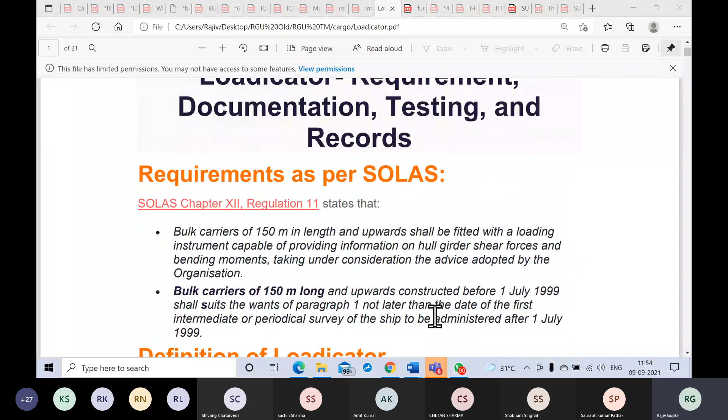So this is what we covered so far. Just to share screen. Now you will have to confirm that you can see the share screen. Yes, sir, we can see. Okay.

This is what we have talked about. Requirement by SOLAS Chapter 12, Regulation 11. This we have already talked about. Maybe you want to note down, so I'm just going to stop for a minute if you want to note down.

See, if you have a question on Loadicator, it is going to be maybe part B of the cargo work paper. You must address the issue why it is required, by what chapter, SOLAS Chapter 12, Regulation 11. You must mention that because that will exhibit that you have gone through the theory. So you must write it. Requirement is as per SOLAS Chapter 12, Regulation 11.

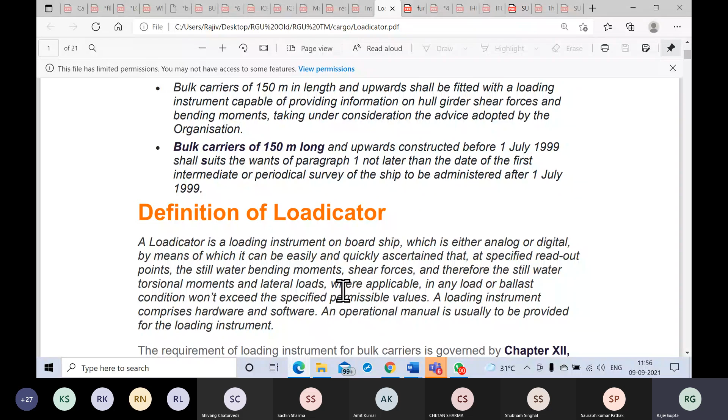Having done that, you can move on to say that Loadicator is a loading instrument which could be either analog or digital, by which you can ascertain still water shear force, SWSF, and SWBM for any load or ballast conditions, with permissible values already prefed in the instrument. This instrument will comprise both hardware and software, and it will be accompanied by what is called an operational manual.

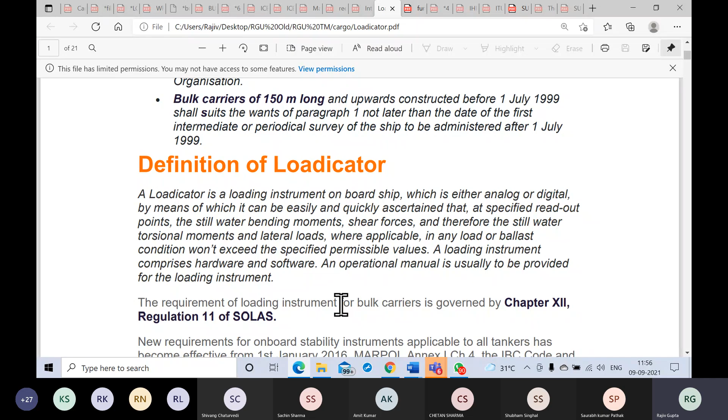Further, we had talked about this one, that requirements on board will also extend to all tankers from 1st January 16, which is coming from MARPOL Annex I, Chapter 4, IBC code and IGC code. All have been amended to include this, that you should have an onboard stability instrument. Ships constructed on or after 1st January 16 should have this instrument on board at the time of delivery. If constructed before 1st January 16, then this should be placed on board at the first renewal survey.

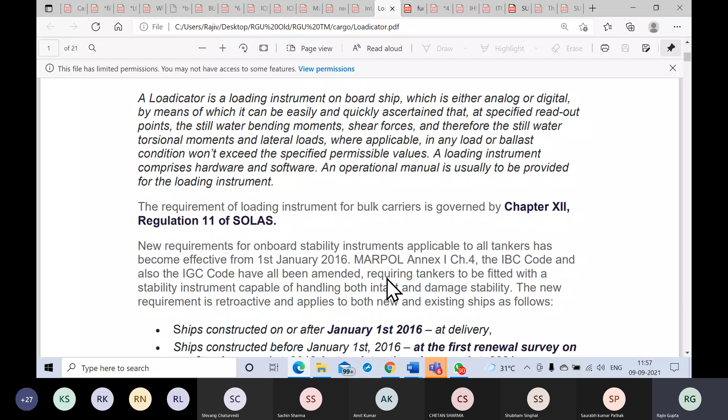It says that if the ships, tankers, have been constructed before 1st January 16, then at the first renewal survey on or after 1st January 16, but with a catch, no later than 1st January 21. So that is why I'm saying we can safely assume that all this has been taken care of. We have passed that date, 1st January 21, so it should be there now on board every tanker also.

After it has been installed, it should carry a certification from the flag, from the administration, that this is certified to be used, and they will issue a document of approval. This could be done on behalf of the flag by the RO, recognized organization. Normally, it is the class. I say normally because RO could be anyone recognized by the flag state, but mostly it is the class which is recognized as RO. So class can give a document of approval for the loading instrument, and then you have taken care.

Okay. Obviously, the tankers under the purview of IBC and IGC codes have got a certificate of fitness for carriage. Anybody worked on these kind of vessels which carry certificate of fitness for chemical tankers and gas carriers? You do have a certificate of fitness. So the approval certificate for loading instrument is only a supplement to that. First of all, you should be having a certificate of fitness for chemical tanker and gas carriers. Then, to supplement it, you are also carrying a Loadicator with a certificate of approval. You cannot have a certificate of approval for Loadicator if you do not carry a certificate of fitness to carry chemical or gas. So much for the documentation, certification, etc.

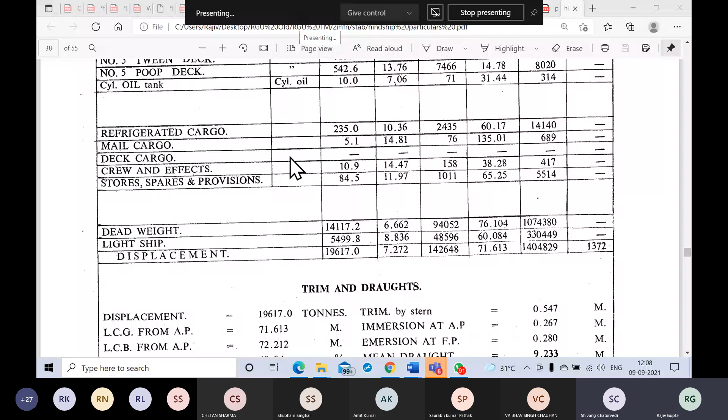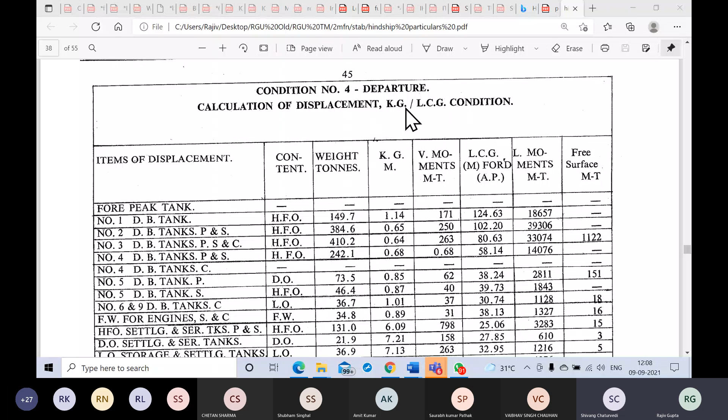Okay, regarding the test condition which we were talking about, please understand that we are just looking at an example from Hinship particulars. So this is a condition you're very familiar with. You're using the book. Condition number 4. It says departure, calculation of displacement, KG, LCG, etc. Now, in this condition, he has given the various configurations of the distribution of fuel oil, ballast, everything is given. Something which you are using day in and day out.

So instead of going for a test condition, if you put this condition into your Loadicator, which has the particulars of the ship already fed, then everything, how it is entered here in the book, you enter in the Loadicator. Diesel oil 73.5 in the 5 DB tank port. Example, HFO 46.4 in 5 DB tank starboard, etc. You go like this. Put cargo in number 4 hold, number 2 hold, etc.

You keep filling up, and then what you need to do is match these results. You should end up with trim by stern, immersion at aft perpendicular, emersion at FP, mean draft, draft at AP, draft at FP. Okay, one thing, where are the Hinship's drafts painted? Painting of draft marks as far as Hinship is concerned is on what location?

Please remember, as far as hinship is concerned, the draft marks are painted at the perpendiculars, just for reference.

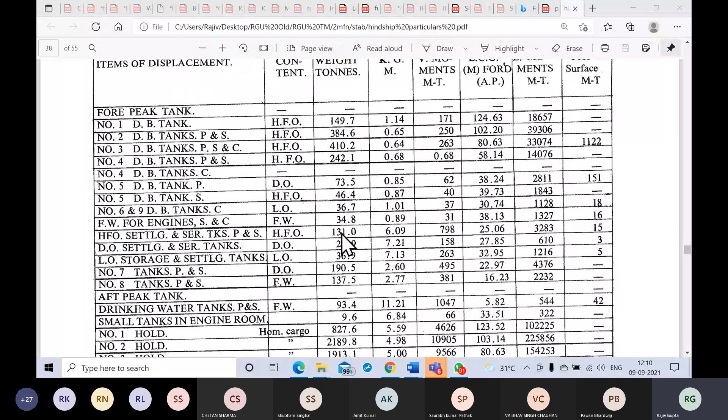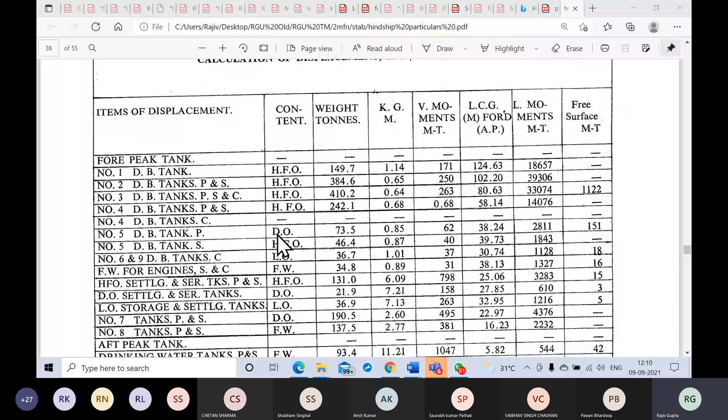But sir, does testing require entering all the values, including the distribution of weights? Yes, you have to enter all of that. Let's say you select condition number 4 as the test condition, then you enter all these values inside the loadicator, everything. The end result should match here, including KM, KG, GM solid, FSC correction applied, corrected GM - everything should match.

Yes, it matches. Let me tell you one more thing - because you are going to start working as chief officer, and because you will be working on the loadicator of that ship which you have taken over as chief officer for the first time, it is a good idea to test it out so that you are confident about the loadicator. The first thing you should do is select a condition, maybe not the test condition, and then enter everything and see that the results are matching, which will give you personal confidence in that loadicator, since it is showing the same results as the approved hydrostatic particulars. So now you can gain confidence in the loadicator itself.

You must do it, for every ship you join, definitely for a ship you're working on for the first time - maybe not first time as chief officer, but the ship itself for the first time - you must check out the loadicator to gain confidence in the instrument.

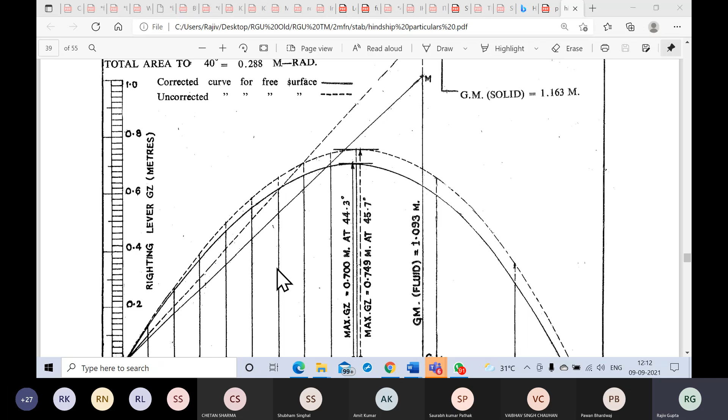As you have done it, and if you see everything is good, results are matching, everything is fine, then what will you do? Take a printout with a clear indication of which condition you are talking about. Take a printout, sign, stamp, and get the master to sign it, and keep it as evidence of having tested the loadicator, which is going to be required.

It is going to be required by the class surveyors, etc. when they come on board, maybe even PSC. They would like to see that you have tested the loadicator. So this is one way to do it, and you must document it by signing, stamping, and keeping a record, and of course it has to be countersigned by the master.

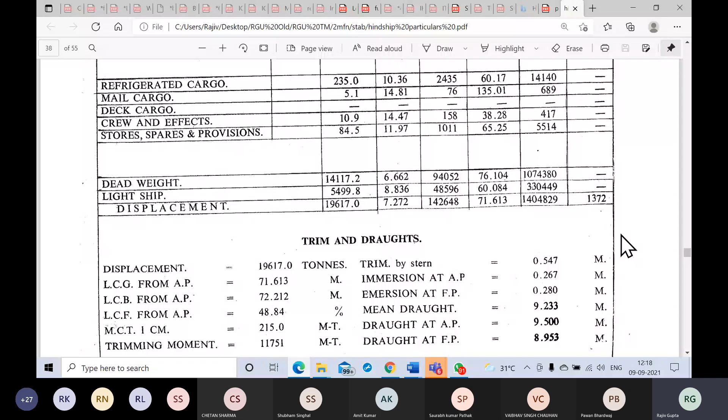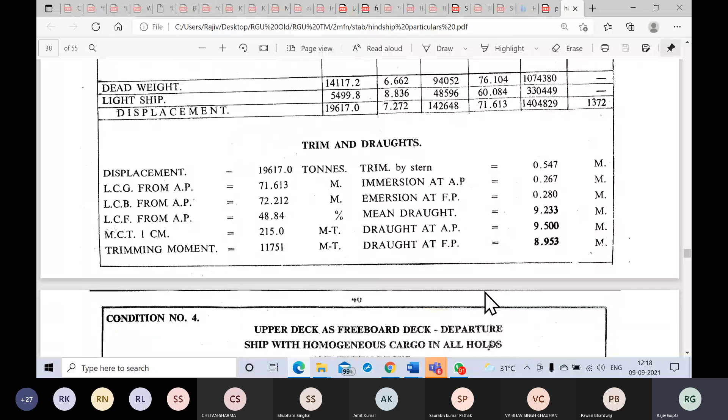If your Loadicator is not working, one thing is certain - dispensation is always available to be applied for, but you will have to prove before dispensation, you will have to prove how you will work in lieu of the Loadicator not working. Then you may get it, if you can prove it correctly, which you will be able to do.

Many times you discuss, why do we calculate this SFBM manually when the Loadicator is there. But there is one condition where the Loadicator will not be useful because it is not working. Then you have to be aware of the facts and the system to be followed to manually calculate. Somewhere this knowledge will come in useful. Although the chances are very low, it can happen.

Okay, so this is what I had opened to show you. You can select any condition. We had seen condition number 4. You can scroll down, you can go. If this is okay, you can go down to condition number 5 and maybe feed this one and again match the result, but you have to do this only once.

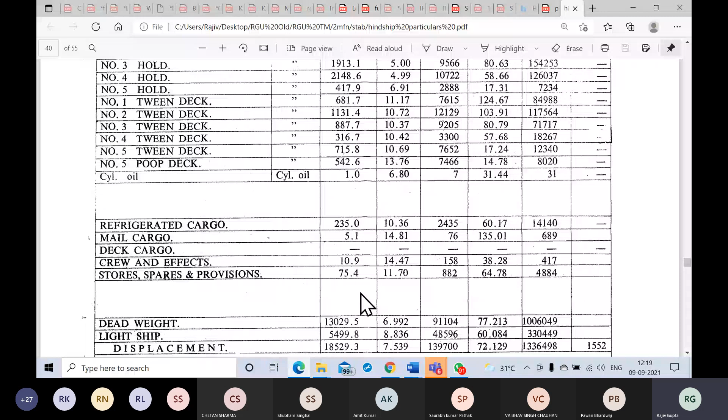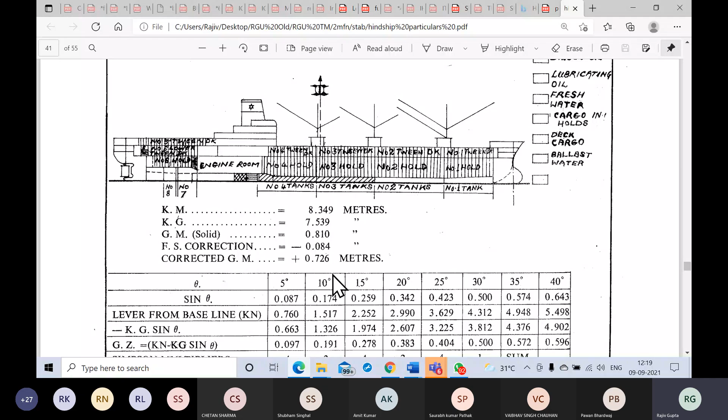Once is enough. If you have fed in everything for one condition and the results are matching, including drafts, including the LCF calculation, and also KM, KG, GM solid - everything matching - then you are confident that the Loadicator instrument is working correctly. You can preserve the results to show anyone who comes that your Loadicator is effective. But that is what you need to prove.

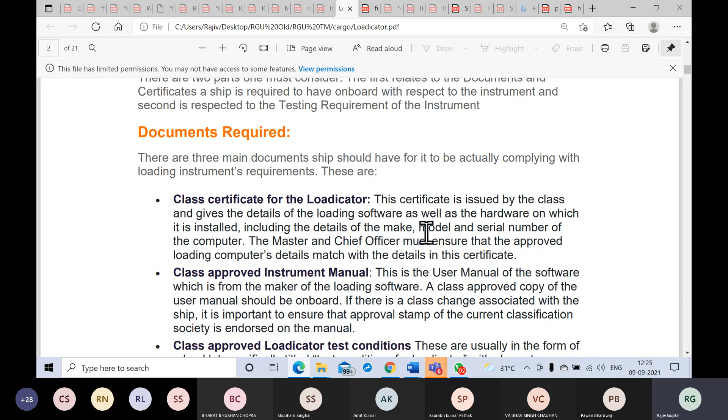Okay? Then of course you should have a class approved instrument manual. This is a user manual. This should be also there from the maker of the software. Approval stamp of the classification society should be there on the manual. And if there is change of class, then the approval stamp of the current classification society should be there.

Now, obviously, when you talk about test conditions, one thing is simple, that you have a test condition inside the hydrostatic particulars. But I always believe that you should take another condition and use it as a test condition just for your benefit and for your confidence. Use any condition given in the particulars as a test condition. It should match. The result should match.

Test condition, ठीक है, match करेगी. But then you see, maybe the Loadicator is prefed with the test condition. So best तरीका is that you select any random condition as used for test. ठीक है जी?

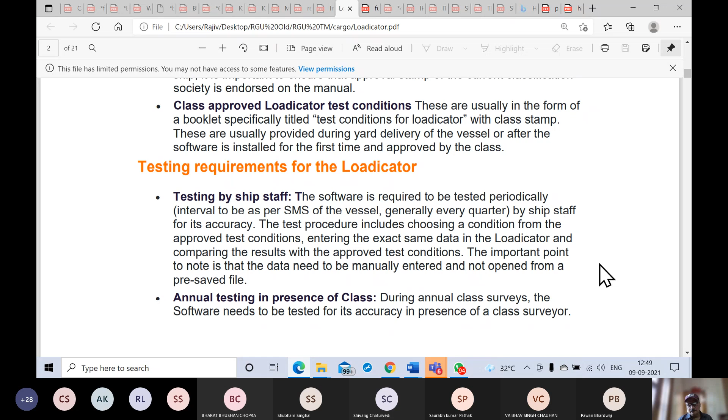Also, when you're doing it in presence of class surveyor, it is a good idea, although he will also do it, but you're supposed to take a printout of this, stamp it, and also ask the class surveyor to stamp it. You have more authentication. And then of course you retain it in your file.

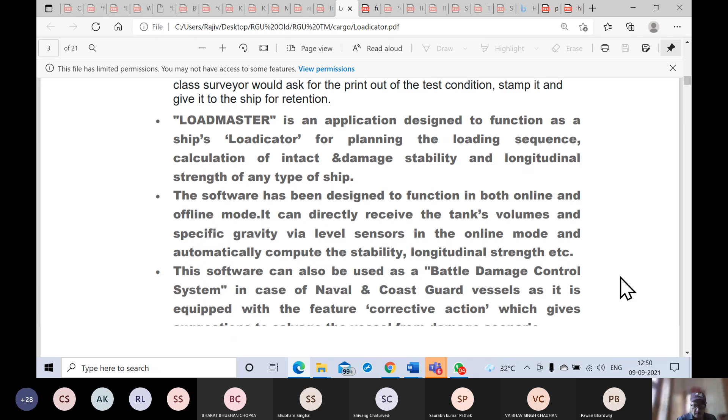So there is another way by which the Loadicator, the software, can be designed to have an online input, which means directly receive the tank's volumes via level sensors in the online mode. High tech may not be possible in every Loadicator, but it is possible that they have an integration with the online level sensors, so that inputs for tank's volume and specific gravity can go straight into the Loadicator.

And then it can automatically compute stability and longitudinal strength, but this is high tech, it may not be possible in every Loadicator. Which may not be a regular function, but it is possible.

So when we talk of preparation for loading condition, then you should have the facility to create and store new conditions, apart from the ones which are already saved. Retrieve and edit stored conditions. Manually enter tank soundings, percentage, volume, and holds, cargo compartments. A part of damage stability criteria should be incorporated into the Loadicator so that you can actually have a view in case there is a damage.

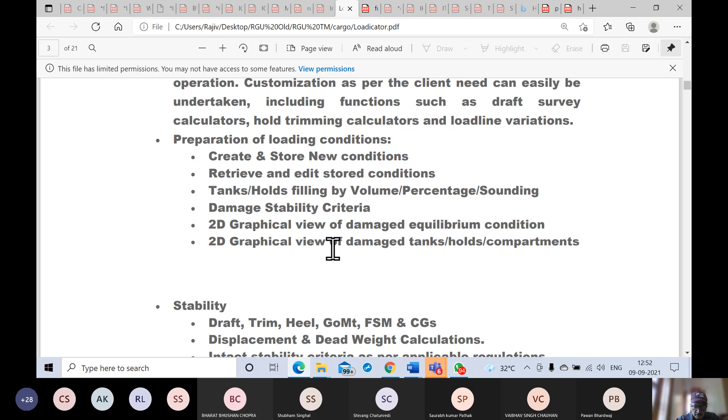As far as stability is concerned, inputs and then output should include draft, trim, heel, GM transverse, FSM, CG, etc. Displacement and deadweight calculations, intact stability criteria as per the applicable regulations. You are aware of this one, right? Intact stability criteria. And then the generation of reports. Printable.

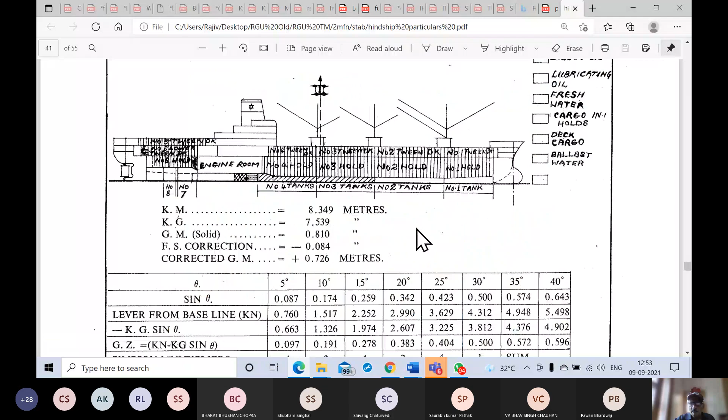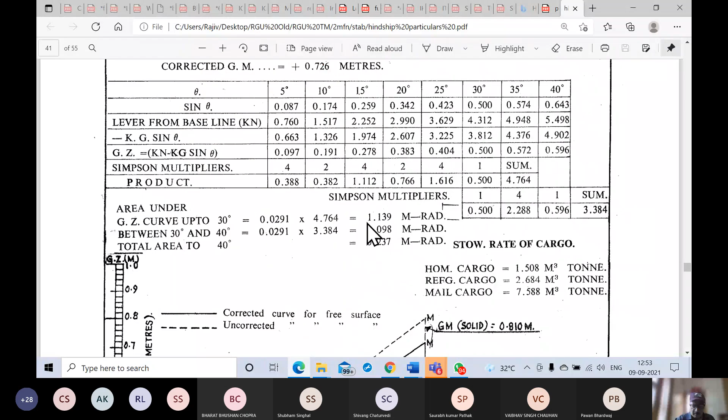This one is telling you the intact stability criteria. This should be also included in your printout for the Loadicator. There is a stability criteria. What is the GZ curve up to 30 degrees? How much should be the area under the curve? Minimum requirements, and this should also match area between 30 and 40 degrees from this diagram. This diagram.

Which is a GZ curve. So this you can do manually also. You can actually plot it yourself also. But in a Loadicator, this will be exhibited like a printout. On the y-axis, you will have the righting lever, height of GZ, and on the x-axis, you will have various angles of heel. Interval could be maybe lesser, depending on the software, but normally 5 degree, 10 degree, 15 degree like this.

And of course, the issue about minimum GZ or maximum GZ and GM fluid, which is obtainable if you draw a perpendicular line from 57.3 degrees, extend it and then come across. And reading on the y-axis will tell you how much is the GM fluid, initial GM fluid. So this is something which will be also captured in the Loadicator.

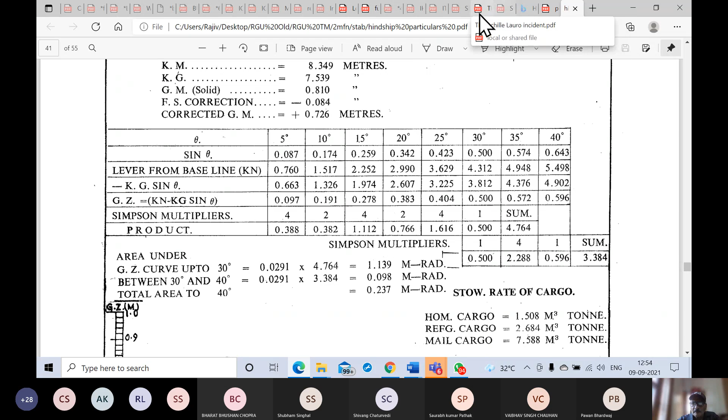We have 1 minute, just give me a minute. Trying to look at our PDF. हो गया. Yeah.

Then of course strength calculations.

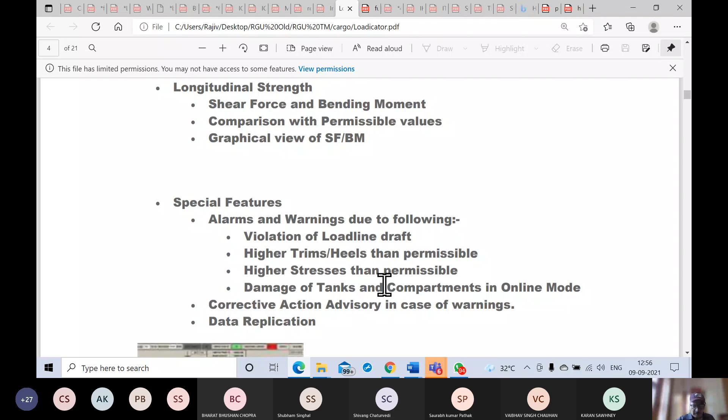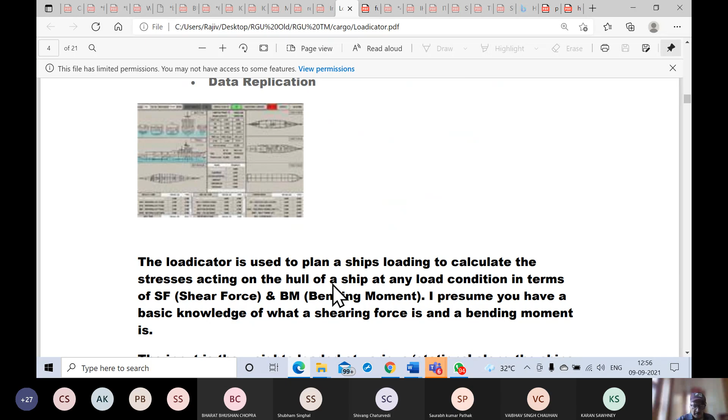So this is also used in the Loadicator to obtain ship's loading, hull stresses, etc., shear forces, bending moments. The weights are input at what are called various stations along the ship's length. Weights could be in terms of cargo, fuel, ballast, etc.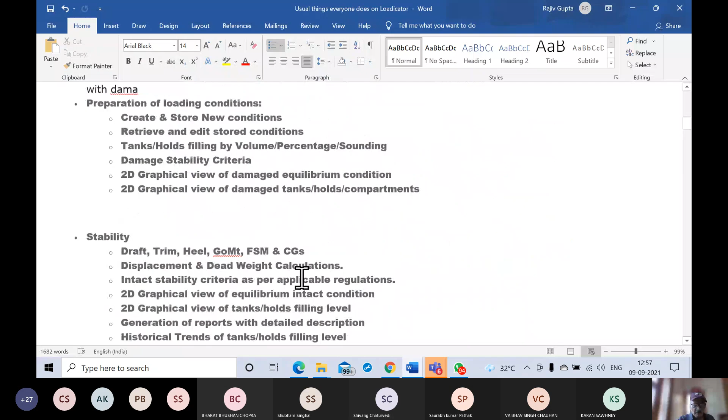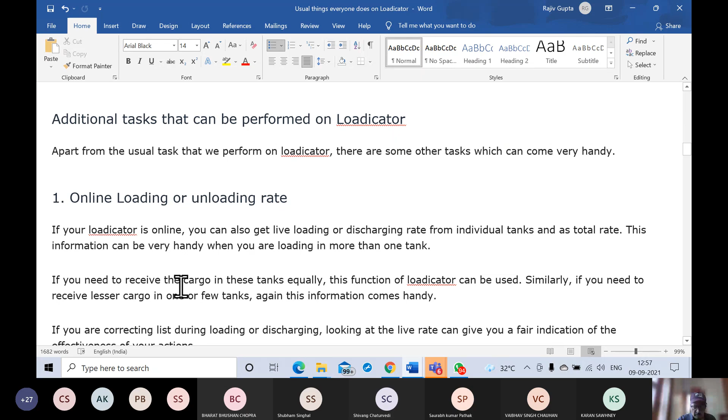Some additional tasks which may be performed is online loading or unloading, which means that you are integrating it with tanks, individual cargo compartments, so that online, straight away the input is going into the Loadicator. Again, this is not going to be every time. I mean, this will depend on the equipment, the kind of instrument you are using.

It can give you an indication of rate of loading because you have input, let us say 10 minutes interval. So it will calculate the difference in cargo quantities for last 10 minutes and then average to 1 hour to give you a loading or discharge rate. After all, it is a computer, just a computer.

Okay. कोई भाई अपना on the move, on the move. Sani, are you in somewhere? No issue with me. Just asking you because you should mute yourself.

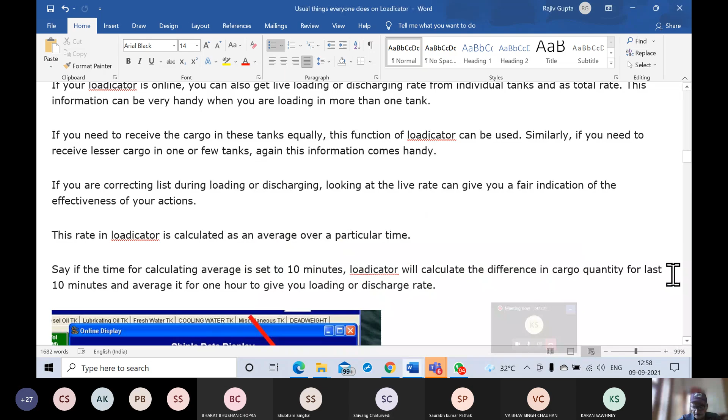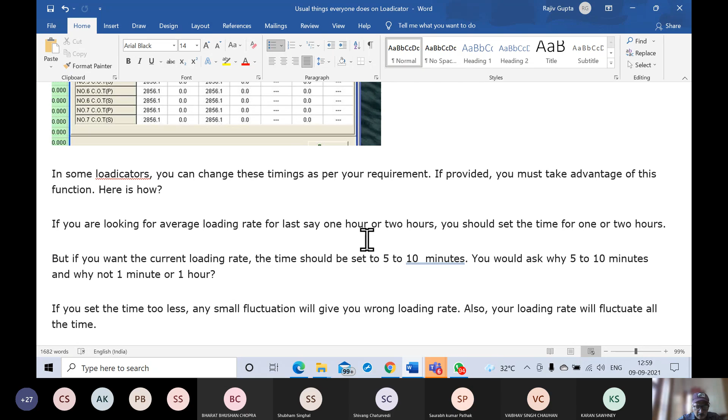So you can use it for your advantage, the loading rate, discharge rate, etc. Then you get clear indication for what is happening in last 1 hour or 2 hours. You want current loading rate, then the time should be between 5 to 10 minutes. Because if the time is too less, small fluctuations will give you wrong loading rate, and your loading rate will fluctuate all the time.

If your time is set too high, then the average rate for that time will not be the present rate. So you will have to come to a conclusion, if you are configuring this for loading rate or discharge rate, how much time interval it should take. Now, there could be some fixed errors in the loading equipment. That is what

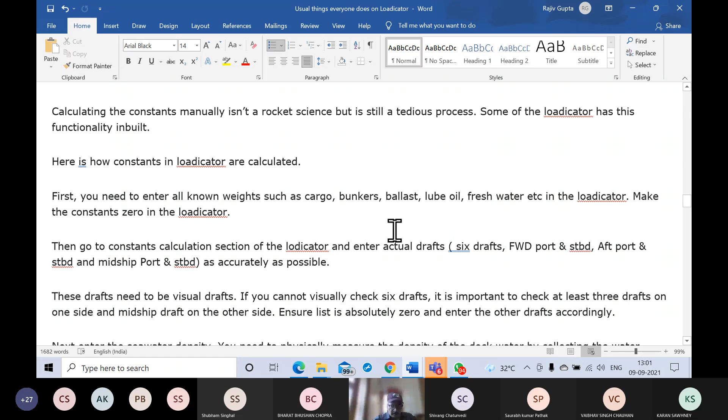Okay. So we are saying how to calculate constant using a Loadicator. So firstly, you enter all known weights like cargo, bunkers, ballast, lube oil, fresh water, etc. in the Loadicator. Now go to the constant calculation section of the Loadicator and enter actual drafts, which are read drafts, which you have actually read. 6 drafts. Forward port, forward starboard, aft port, aft starboard, midship port, midship starboard. They have to be visual drafts.

If you cannot read 6 drafts, which should not be a very difficult thing, then you have to read at least 3 drafts on one side and midship on the other. In this case, you will ensure that list is 0. Enter the drafts. Because the list is 0, if you can read only port, forward port is let's say 10 meters, then because there is no list, you can safely enter forward starboard also 10 meters. Although it is not a good thing, but only in a case where you cannot read 6 drafts.

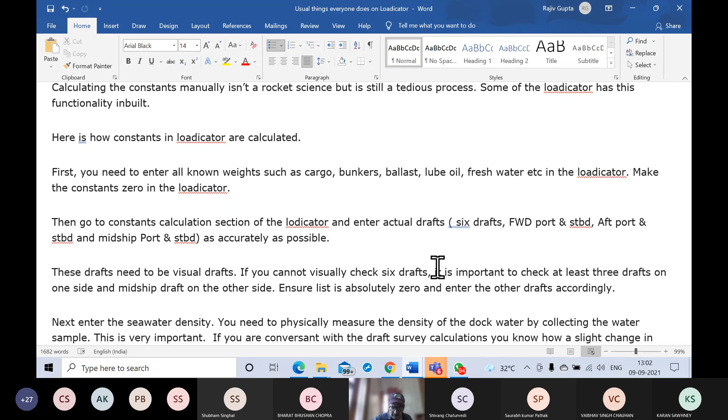Once you have entered the 6 drafts, the next step will be to enter the seawater density. Again, by actually measuring it. At this point of time, you will have to be careful because even a small discrepancy in the density can offset the value of your constant. Because density plays a major part in calculation of the present displacement. So maybe you would like to take 3 checks of density and take an average value.

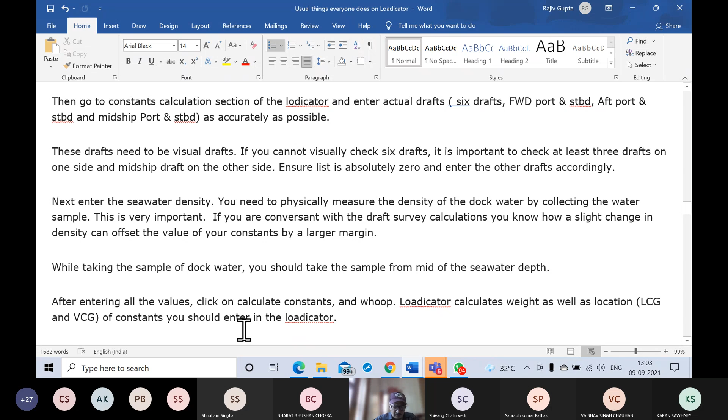Once you have done this, the Loadicator will calculate the weights, and it should be 0; if not, then that is the constant. If it's still arriving with some weight displacement, then that is the constant. Because you've entered all the values, including the seawater density, it should say 0 because no cargo has been loaded. Then if you have a remaining value of weight, that is the constant.

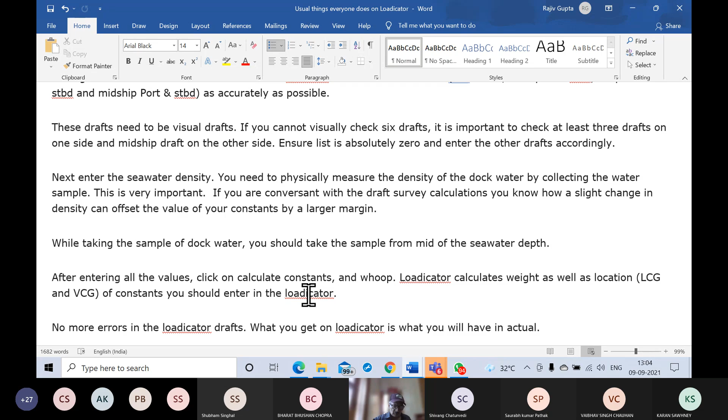And we are going to talk more about it when we actually go and do numericals on draft survey. This is only a Loadicator thing for us to discuss as theory. We will actually do calculations involving draft surveys when we come to the topic of draft survey, in which case the constant will play a major role. You can also do this. You can actually

calculate. Haan ji, boliye. Karan Sawhney, I request you kindly mute yourself. 2-3 times it has happened. I've tried to mute you. Your voice is creating disturbance. So just mute yourself. Karan Sawhney. Okay.

You can also use the Loadicator to go a step further. You can use it to reach a desired trim, list or draft. Otherwise, you have to use trim tables to get to this conclusion. If your Loadicator is not available or is not functioning, then you have to use trim tables. If you have a Loadicator, then it's simple, just use it to get the desired trim, list or draft. If not, then you have to use trim tables from your hydrostatic particulars. You are aware of that, trim tables? Yes, sir. Okay, very good.

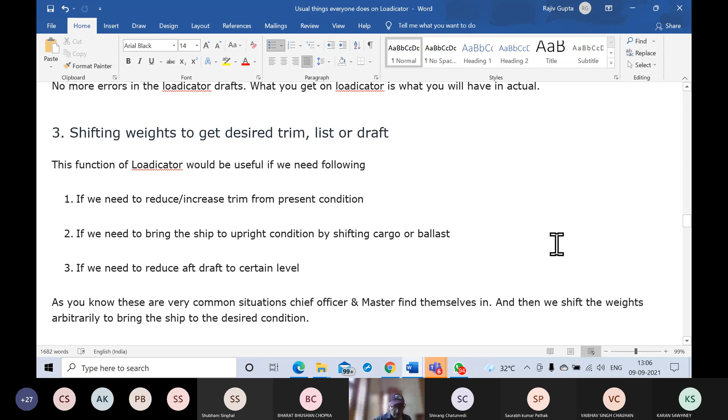Some functions which can be done with Loadicator, that is what we are looking at. We are not doing an exercise on it, because actually speaking, every one of us should have a Loadicator software, and then we should use it to work out and compare results. But of course, this is not possible right now. So we can only discuss the theory part. Sir, I have a question. Yes, please.

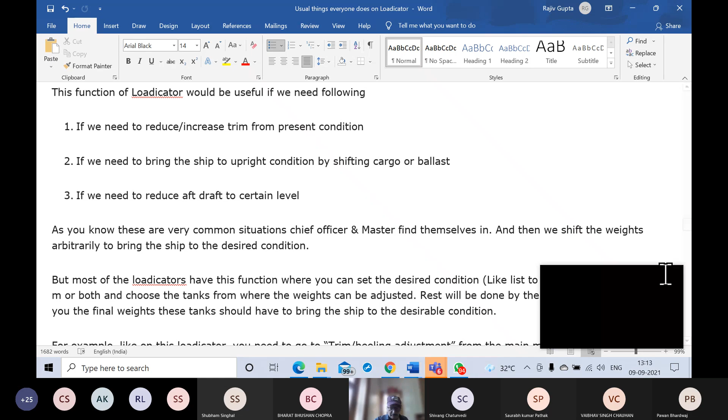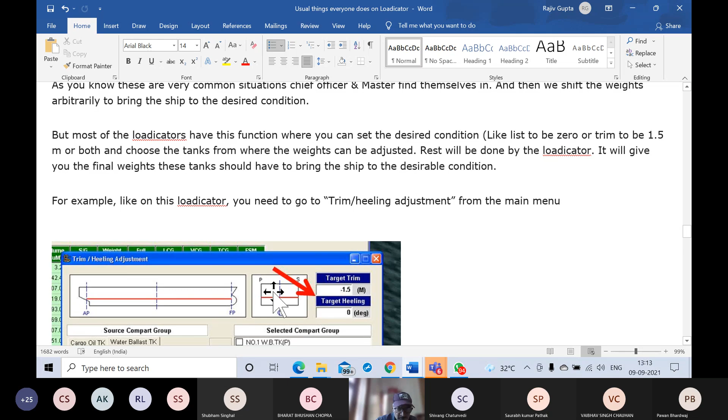So you can use this to calculate how much desired trim or draft you want to achieve by using the loadicator, or if this facility is not available, then you have to use trim tables. One example is here, but this is not generic. This is customized for this particular loadicator.

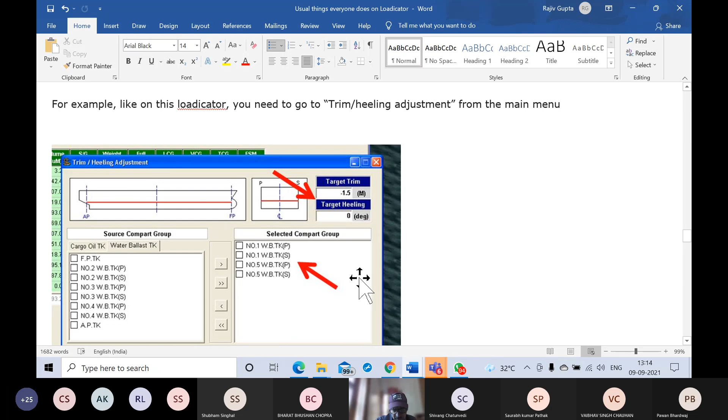You go to this button, target heeling, target trim, click on it, then come to a conclusion. But this is not with every loadicator. This is an example for this particular loadicator. There may be some other buttons, there may be some other facilities, but more or less, it is user-friendly equipment.

This is also possible with some loadicators, that you just enter the ullage of a particular tank and it will give you the volume to match with your ullage, because the ullage table is pre-fed. But it is also possible that you may have some discrepancies, because maybe the ullage table is not corrected in the loadicator for trim and list.

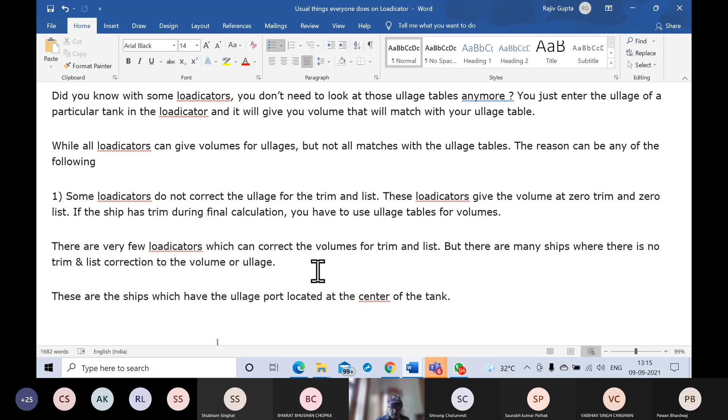Mostly the loadicators give the volumes at 0 trim and 0 list. If the ship has got some trim or list during this, you will have a discrepancy in the readouts. So these will be localized problems. You can also have wedge calculations done.

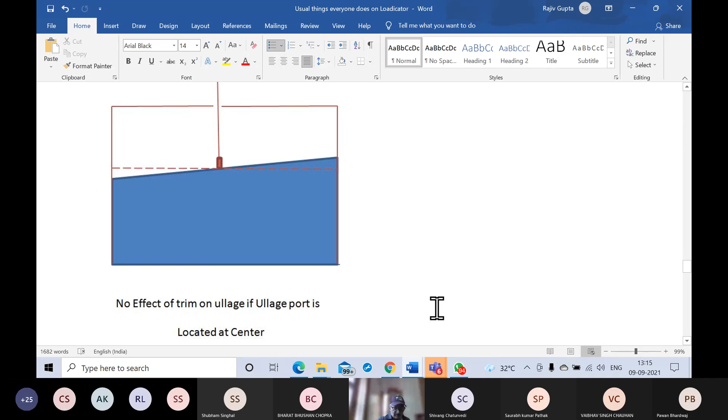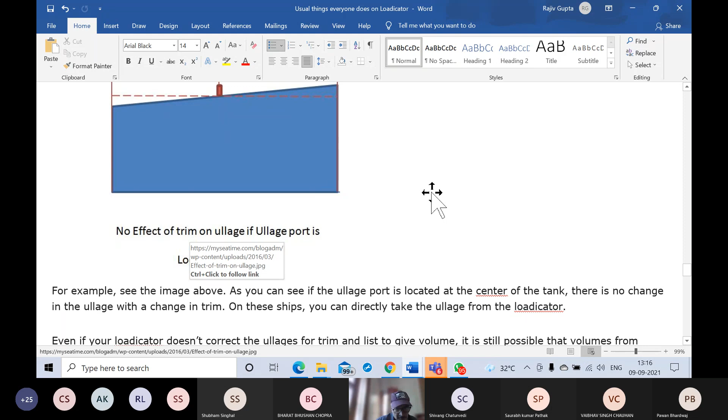This is just telling you the effect of trim, or no effect if the ullage port is located at the center. Here, actually speaking, the ullage is varying. Here it is empty, here it is full. This is the wedge. It is the wedge formula. But if the ullage port is located at center, it will give you correct data. No change of ullage with the change in trim.

And the wedge calculation, which is also part of your tanker problems, like this. This is the wedge. Again, this will be more clear when you do the tanker numerical on wedge calculation. But what we are discussing is that even the loadicator can be used to do this calculation.

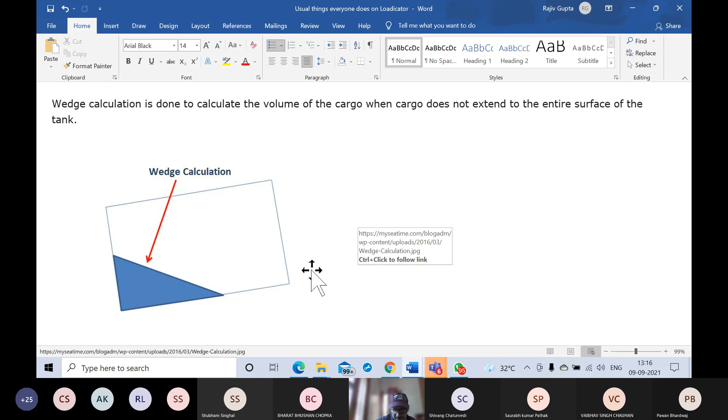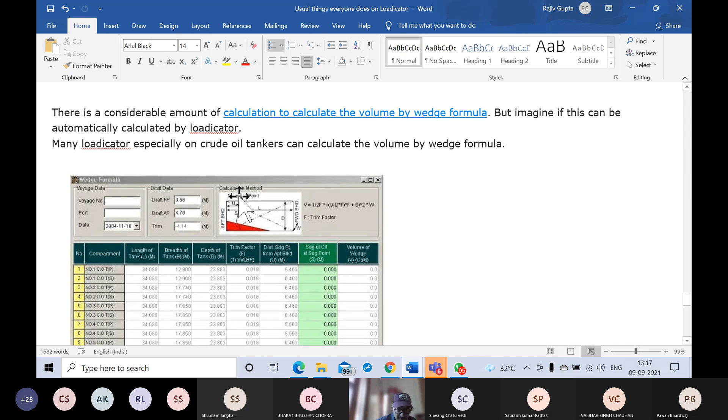So some loadicators, especially on crude oil tankers, facilitate the calculation of volume by wedge formula. The wedge formula is prefed. You enter the data and it will calculate by wedge formula the volume of the tank right now, because the wedge formula itself is prefed. This is the point.

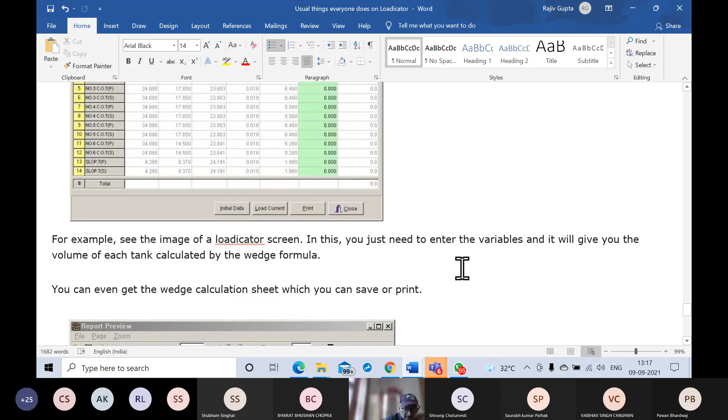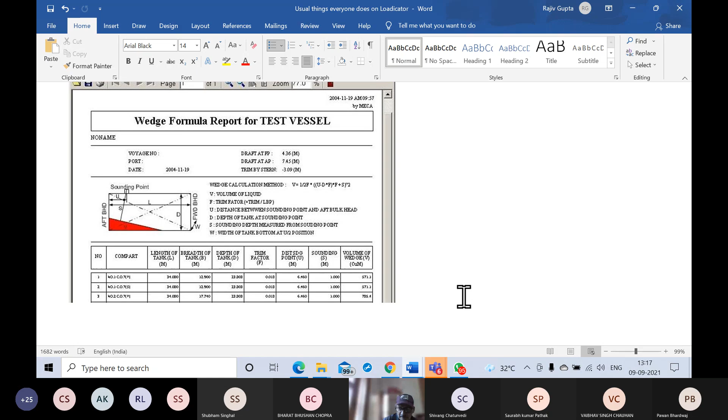It should be possible to save it or print it. Wedge formula report, it says, for test vessel. Yeah, that's about it. Test condition is done. Stability data that will give you special features is done.

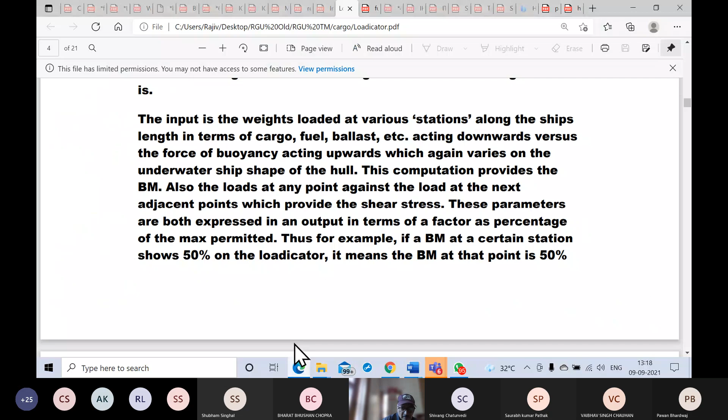So it is never advisable to exceed the stresses of 100%. More than 100% is never advisable because in a seaway this could exceed 100. So if you're close, maybe 98%, in a seaway this could go more than 100%. So you should always keep a buffer. Do not exceed more than 95, 96% for old ships.

Please be advised and note, which I always agree, the ship should be regarded as a girder, a big girder. After that there are compartments, that is all separate, but it should be regarded basically as a girder. When you say a girder, it is prone or susceptible to bending moments and shear forces. So that you should always keep in mind.

Just imagine the ship as a girder. Then it is going to bend because of localized stresses. If the weight exceeds in one location or station of the girder, it is going to create localized stresses.

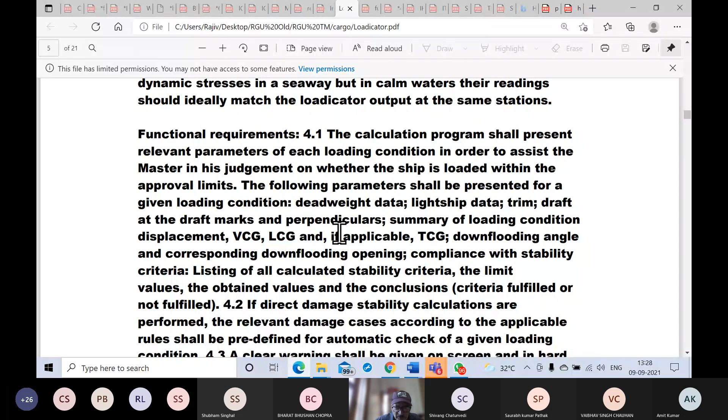So what is the functional requirement of a Loadicator? Firstly, the calculation program, which will present parameters at each loading condition. So the Master is assisted in determining whether the ship is loaded within approval limits.

Now when you talk of parameters, this will involve deadweight data, lightship data, trim, draft marks and perpendiculars, summary of loading condition, displacement, VCG, LCG, etc. This is a functional requirement, all this should be in the output of the Loadicator.

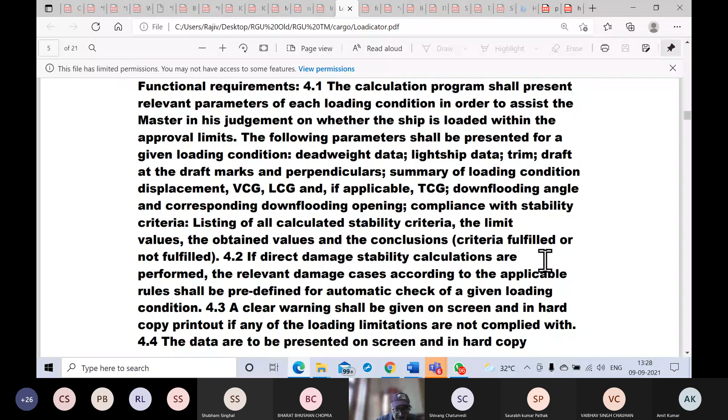Compliance with the stability criteria, listing of calculated stability criteria - these are the functional requirements which you can easily list out if asked, because you are a student of naval architecture. So everything involved for calculation of stability you can list out, should be present in the Loadicator.

If any loading limitations are not complied with or exceeded, the functional requirement is that it should give a clear warning on the screen and hard copy printout.

The Loadicator, I'm sorry I did not mention it, no harm mentioning now, is also very effective and used for carrying out ballast water exchange. Do you know how Loadicator is used in ballast water exchange?

Yes sir. A ballast water exchange can be done by the flow through method and other methods. In that case we can check the stability criteria using the Loadicator. But nowadays, sir, we are using the BWTS system, so it is effective in loading and discharging operation only.

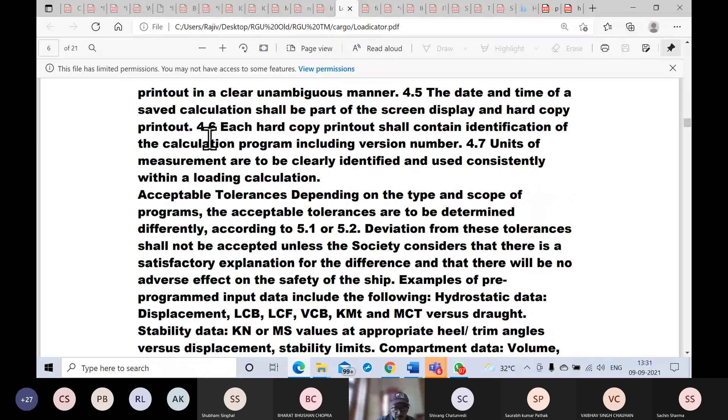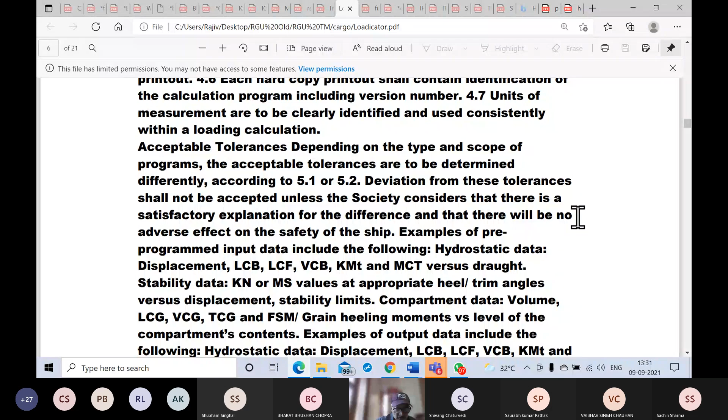When we talk about printouts, the date and time of calculation should be in this hard copy printout also. Identification of the program being used, units of measurement - whether tons, long tons, meter cube, anything - that should also be identified, and the acceptable tolerance levels.

Deviation from these levels should be with consultation with the class which your ship is under. If any satisfactory explanation is not available, there will be no excuse for exceeding tolerance level.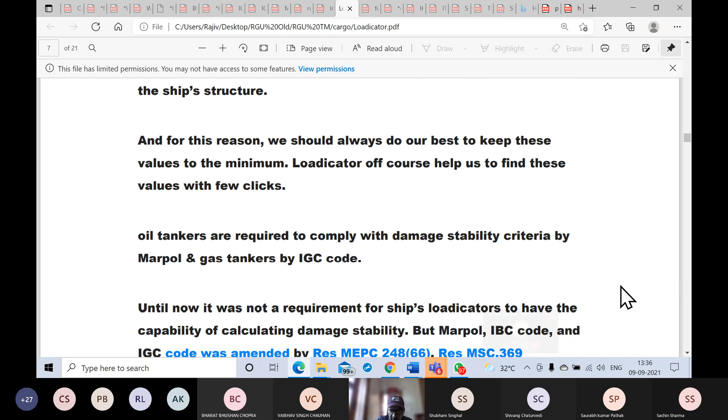Oil tankers are now required to comply with damage stability, and this is now required by MARPOL, gas tankers by IGC. And these are the resolution numbers which talk about calculation of damage stability criteria by MARPOL, IBC and IGC.

In fact, this is important, you should know this because you are going to be chief officers. This is to be complied with, definitely by first special survey after 1st January 2016. All tankers need to have Loadicators that can calculate damage stability. This is a requirement, it has to be complied with.

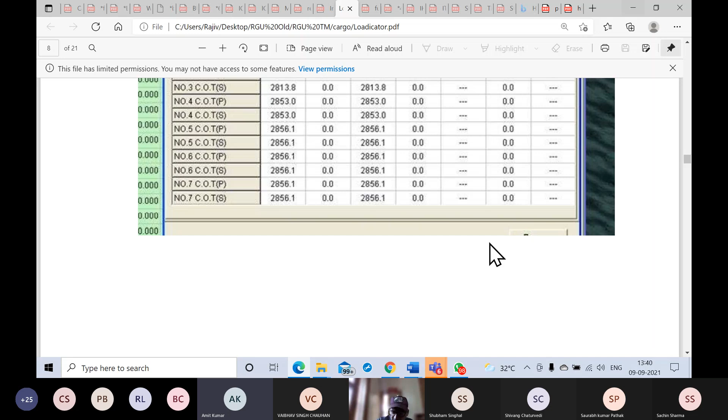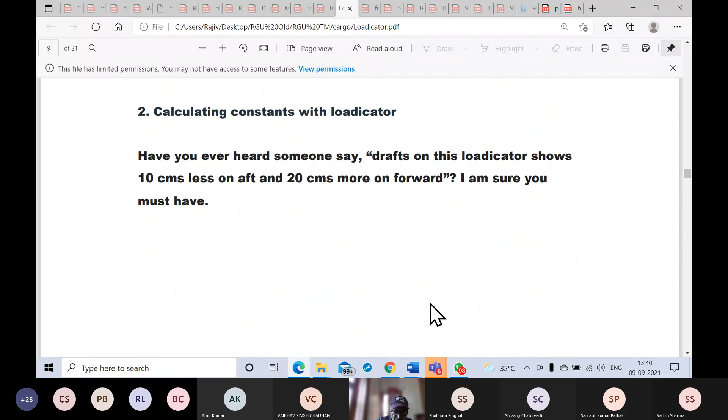So that covers loading rates and calculating constants which we also saw. Now tell me, have you got anything to be raised for this topic? Anything?

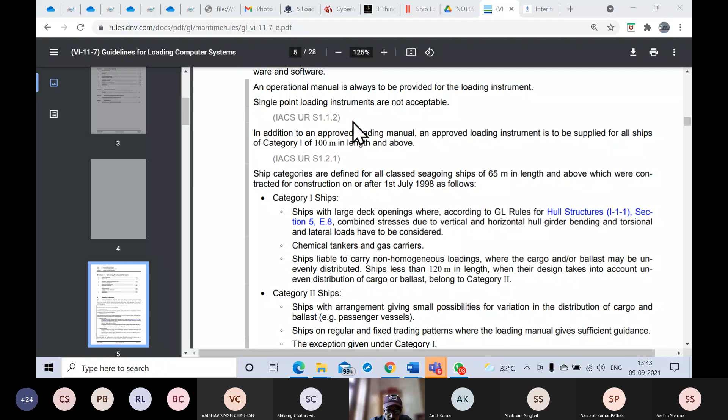Loading instrument, which we have already seen, could be analog or digital. Now, operational manual - this is also covered. Single point loading instrument is not acceptable. In addition, the loading manual and loading instrument categories apply to all class vessels - seagoing ships 65 meters in length and above.

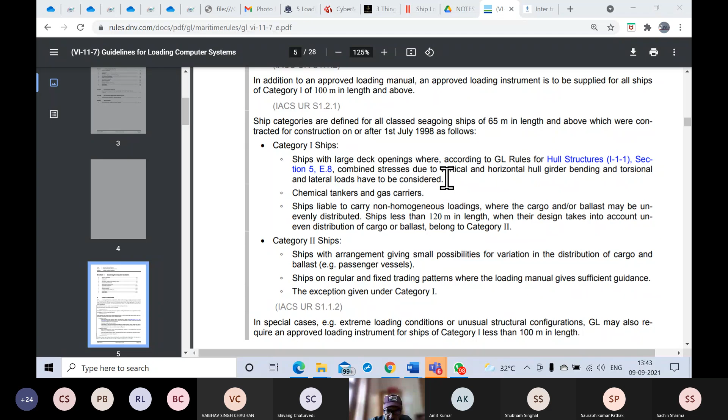And they have divided the ships like this: Category 1 ships are ships with large deck openings, with combined stresses due to vertical, horizontal, hull girder bending - such as chemical tankers and gas tankers. Category 2, now.

Ships liable to carry non-homogeneous loading, where cargo and ballast may be unevenly distributed. Ships less than 120 meters in length, when design takes into account.

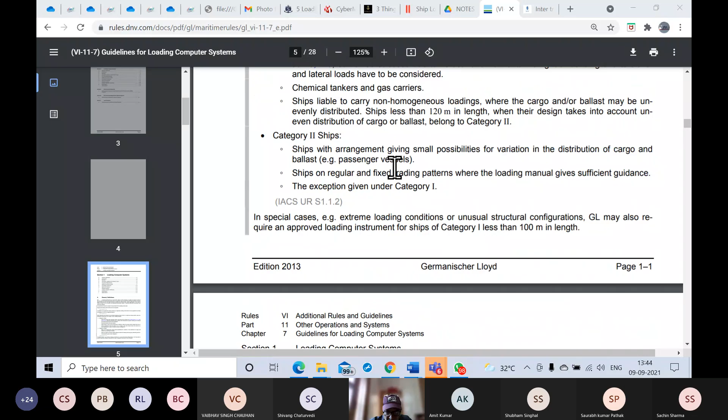Category 2 ships are ships with arrangements giving possible variation in distribution of cargo and ballast - cargo and ballast, for example a passenger vessel. All of them need a Loadicator. Ships on regular and fixed trading patterns.

To come to a conclusion, large deck areas may apply for a container vessel. So, broadly speaking, all types of ships are covered.

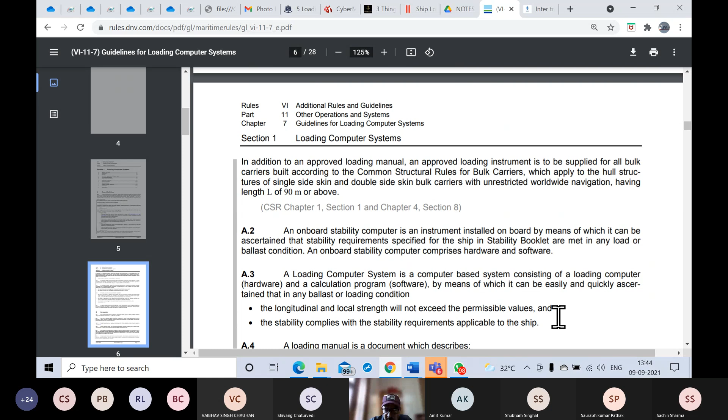But why we started the discussion with bulk carriers is because there was an issue about bulk carriers being lost at sea due to non-compliant loading. So bulk carriers were identified, and a special Chapter 12 was added into SOLAS. That is the reason we started discussion with bulk carriers.

And then of course tankers, because amendments have been made to MARPOL, IBC and IGC codes. That was the reason. But all ships will require it, whether homogeneous cargo, non-homogeneous cargo, large deck area, or passenger ships - all of them need it.